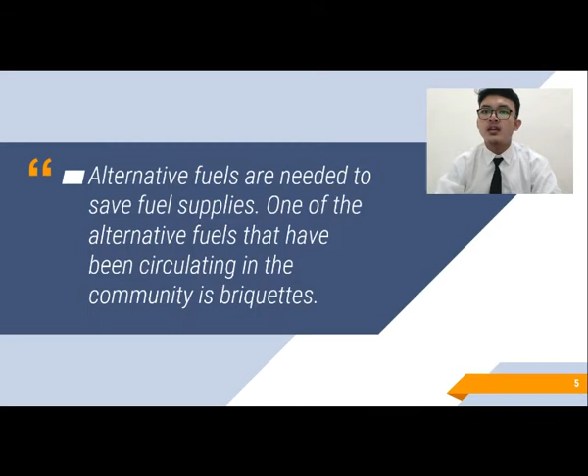Along with the times, the supply of fuel oil is decreasing, so alternative fuels are needed to save fuel supplies. One of the alternative fuels that has been circulating in the communities is briquettes. Briquettes are a source of energy derived from biomass, which can be used as an alternative energy substitute for petroleum and other energy derived from fossils. Coconut shell is one of the raw materials for making briquettes.

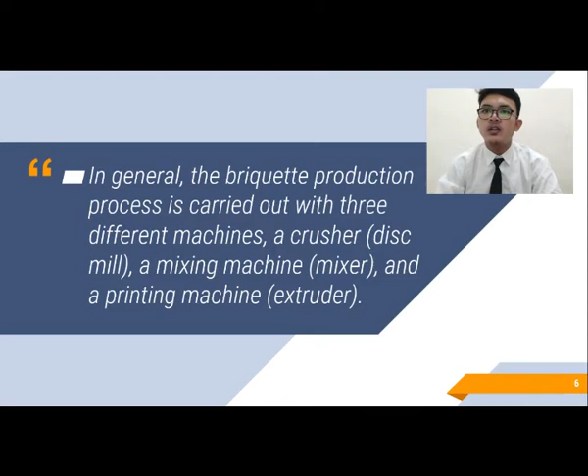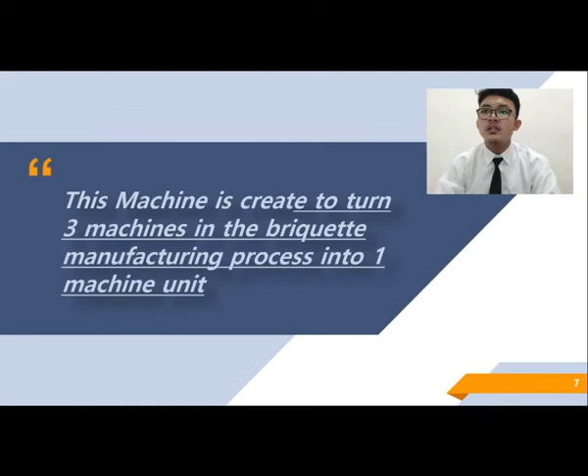In general, the briquette production process is carried out with three different machines: a crusher as disc mill, a mixing machine as mixer, and a printing machine as extruder. Therefore, this research makes an innovation to make the three machines into one machine, so that the production process is easier and more efficient.

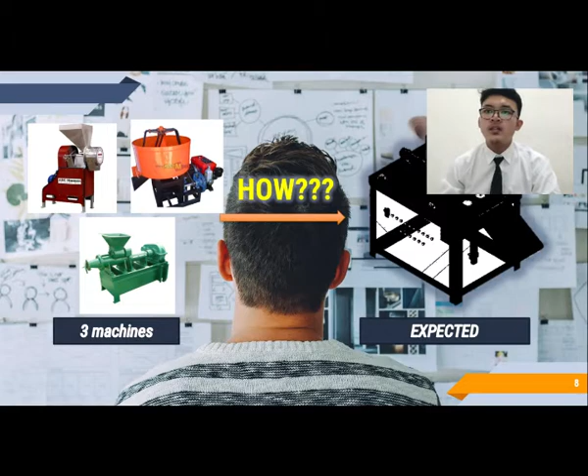The design process will use the Ulrich method, starting from identifying machine requirements to concept selection. Then a technical drawing and planning of supporting components will be made. After that, the tools are assembled and tested. If the machine works successfully according to plan, a production cost analysis will be carried out.

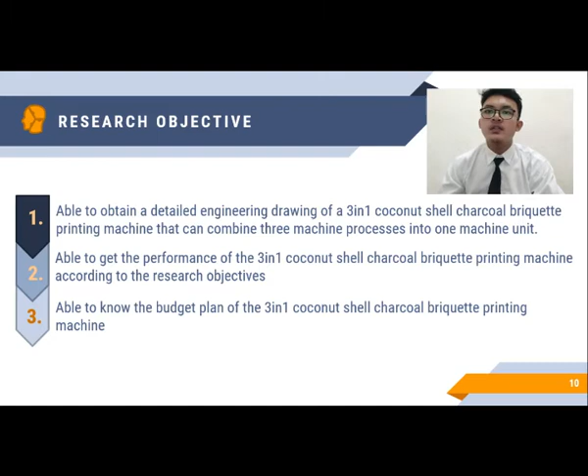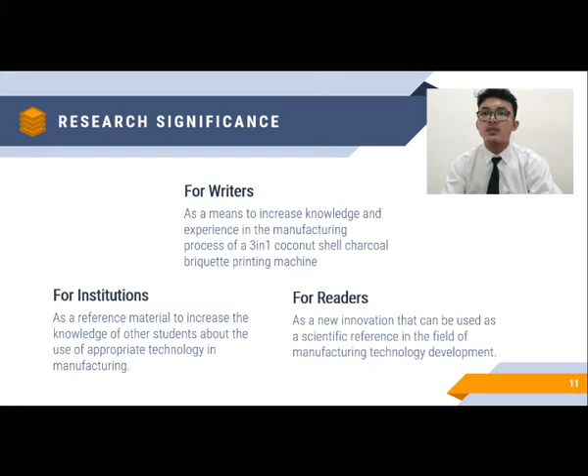This is my research objective: first, able to obtain a detailed engineering drawing of a 3-in-1 coconut shell charcoal briquette printing machine that can combine three machine processes into one machine unit. Second, able to get the performance of the 3-in-1 coconut shell charcoal briquette printing machine according to the research objectives. And third, able to know the budget plan of the 3-in-1 coconut shell charcoal briquette printing machine.

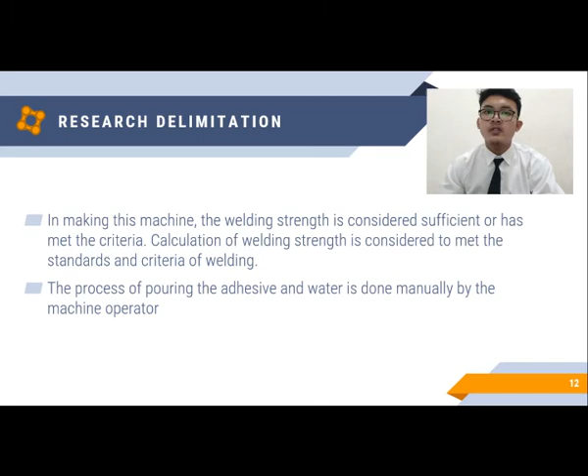This is my research significance: first, for writers, as a means to increase knowledge and experience in the manufacturing process of a 3-in-1 coconut shell charcoal briquette printing machine; for the institute, as a reference material to increase the knowledge of other students about the use of appropriate technology in manufacturing; and for readers, as a new innovation that can be used as a scientific reference in the field of manufacturing technology development.

And this is my research delimitation, the choices made by researchers which should be mentioned, the boundaries set for the study. There are two delimitations that must be mentioned: first, in making this machine, the welding strength is considered sufficient or has met the criteria. Calculation of welding strength is considered to meet the standards and criteria of welding.

Second, the process of pouring the adhesive and water is done manually by the machine operator. It is the last point of chapter 1. We can move to chapter 2 on the next slide.

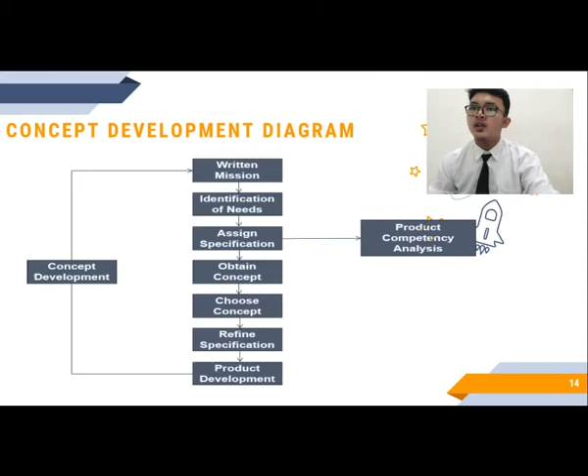The second chapter we reach is literature review. This slide explains the design process that I used to make the flowchart in chapter 3. It's called the Ulrich model. The first step is written mission, which contains determination of purpose and activity objective. After the first step is done, identification of needs is done to know about consumer needs. Since we know about consumer's needs, the next step is assign a specification.

So we can obtain several concepts. We can choose which concept satisfies consumer needs. After the concept is chosen, we need to refine the concept to exceed consumer expectation. For the last, product development is triggered to find out if consumer needs are fulfilled or not. Since the product is popular, we still need to do product development to attempt to modify old products or even create new products to meet consumer demands and needs.

With this, we come to the end of chapter 2. Move to chapter 3 under the title research method. This slide contains the flowchart and its explanation, which I used to design the final project. This flowchart is made based on the Ulrich model that I already explained in chapter 2. The first step begins with problem identification.

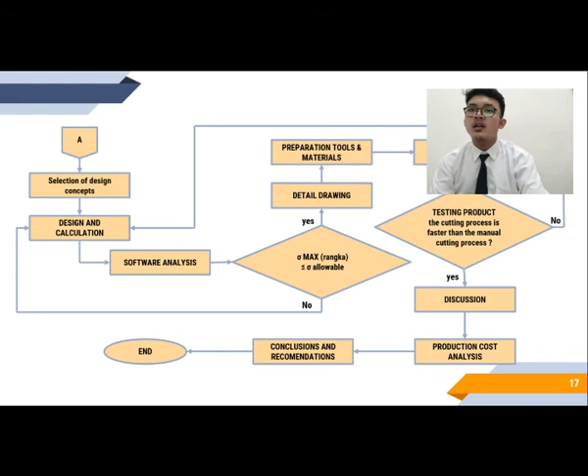After we find the problem, we should do a literature study by collecting various supporting data and information to strengthen the research. Since the problem is found, we need to prepare all the material required to create the machine. After the preparation is all set, the design concept will be made. Since several concepts have been made, we should select the best concept to suit consumer demand. There are various criteria that need to be mentioned, such as strength, size, function, cost, and ease of operation.

After everything is all set, the selected concept appears. Since we get the concept, we should analyze the frame, whether the frame is strong when the stress is applied or not. If the concept is not strong enough, we should refine the design by changing the concept. If it's strong enough, the machine can be created. After the machine has been created, we should do a trial before it can launch to the company.

If the machine does not work according to its function, we should refine the design and try again. And if it works according to its function, we can move further. Since the machine can work well, we can go to the last step, the conclusion and suggestion. Conclusion will include the answer to the formulation of the problem and the achievement that has been achieved from the goal.